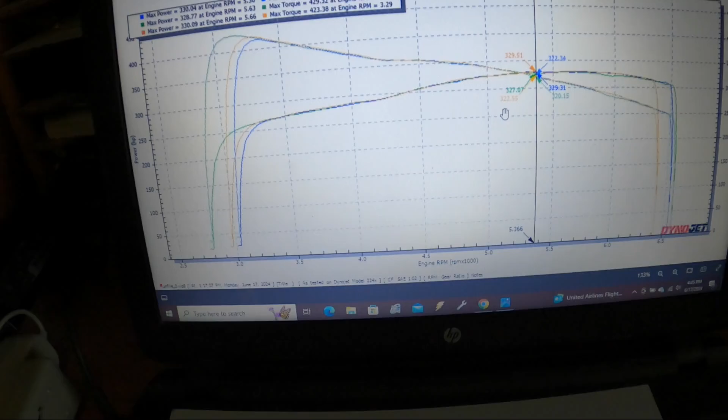Alright, so let's talk about the results. Got it pulled up here, got my graph here, plus I got it pulled up here on the computer. So in the blue here, maybe you'll see it better here.

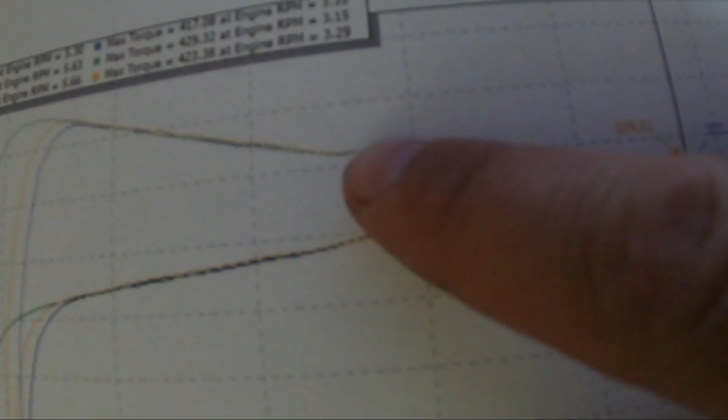That was the first run: 330.04 horsepower at 5,300 RPM. The torque is showing kind of high, but if you're looking at this, this is the converter flash, and even with it locked, I'd say somewhere around here, about 4,300 RPM, it's leveling off, and that's about 359, 360 torque.

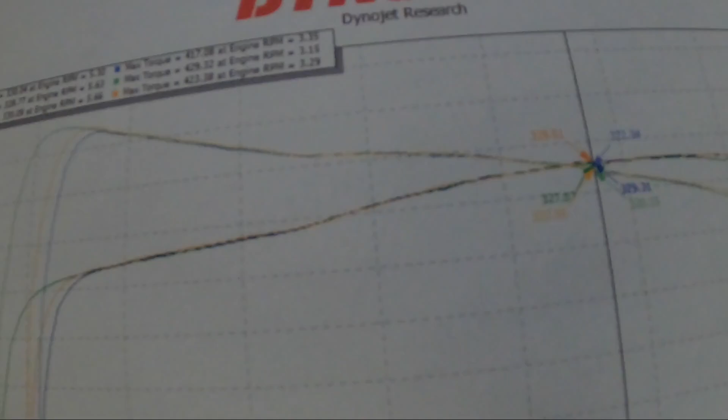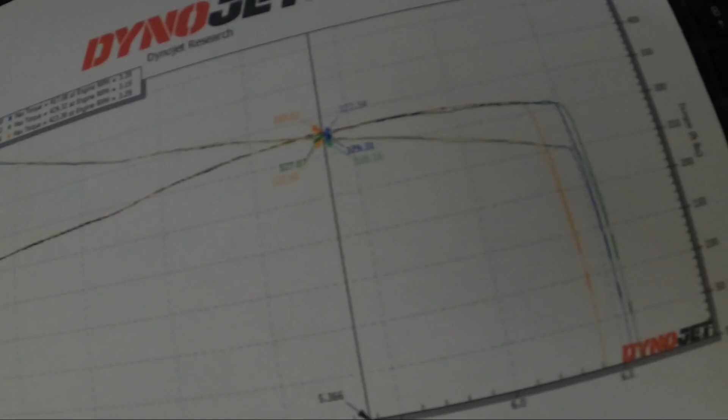Makes more sense. So next run here in green, maybe it'd be better if I just continue here. 328.77, that's open cutouts. You can see it shifted to 5,600 RPM though, but look at the graph, it railroad tracks.

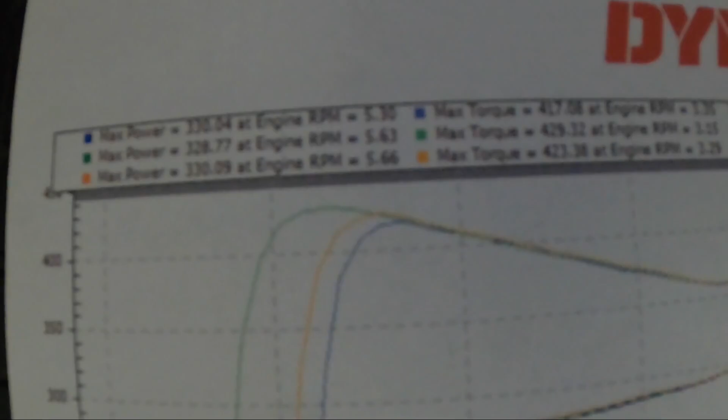So only thing I can say about this, where you're probably thinking the same thing I did - oh, it lost power? Well, not maybe that it lost power, but we shut the truck off after this last run here. I grabbed my channel locks and gloves and I uncapped the exhaust. We started back up, so it might have cooled off some. I don't know, but basically it railroad tracked.

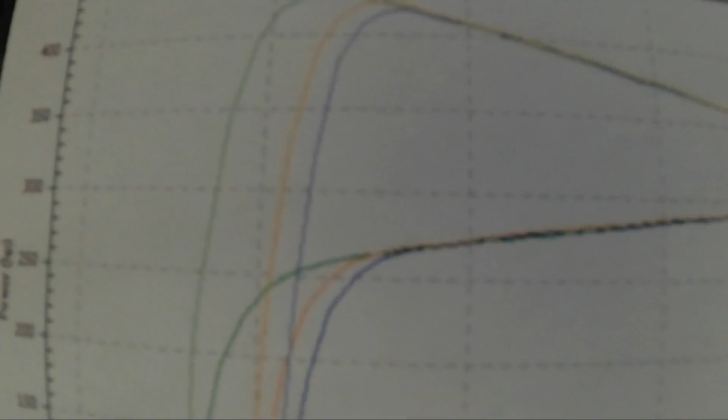It's funny though that it peaked a little higher in the curve. It says it picked up torque on the converter flash maybe, but you could see, look at those lines, it railroad tracked. Then for the last test, you can see I put those old Tahoe wheels on - they're 10.5 pounds a piece lighter, so 21 total. And it obviously cooled down because it took me a few minutes to change out the wheels and tires, and we had to put it back on the dyno and shut it off, strap it down yet again.

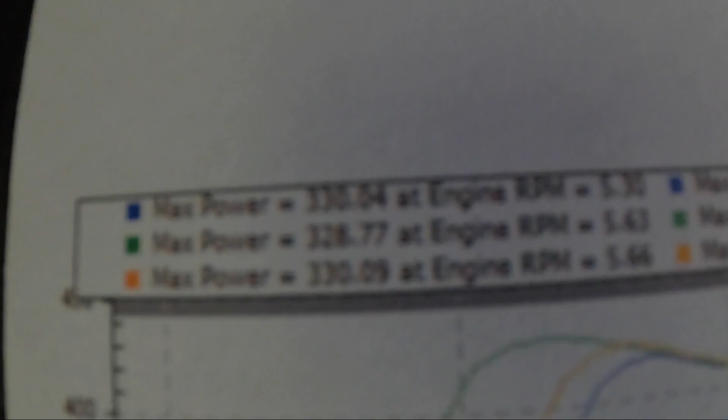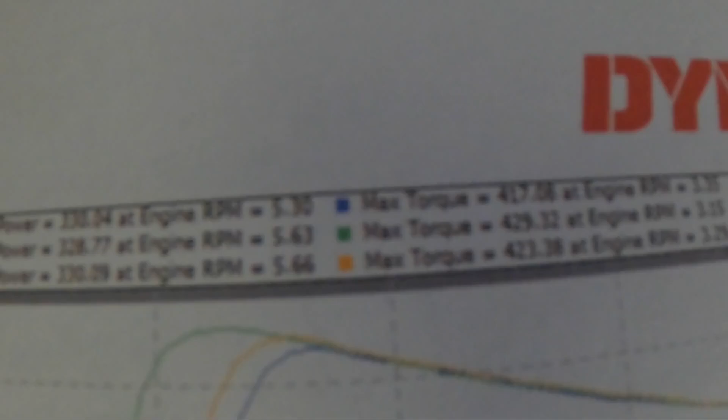Again, you see the torque numbers. You know it didn't lose torque from lighter wheels and tires, that's just the spike's a little different. But yeah, it makes the exact same power. They all pretty much railroad track each other.

Color me a bit confused. We're going to delve in here. I'm going to pull up some threads I found online, some older threads that showed you pick up power from going to a lighter wheel and tire. I didn't expect to pick up a lot, being it was only 21 pounds combined, but I figured a little bit shift in power. None. This is a 248X Dynojet. It's fairly new, they've maybe had, including my truck, maybe 24 vehicles on it. So it's been calibrated, etc. There's nothing wrong with the dyno. It's reading right, it's doing what it should do.

As far as the whole thing with open cutouts versus the exhaust, at the power level I'm at, or lack of, however you want to say it, obviously I built a pretty damn good exhaust system. I'm going to pat myself on the back right now, but I'm going to continue to run with open cutouts at the track because it just sounds cool, and I think in some cases it rattles the guy in the other lane when he hears how loud the truck is.

Hopefully I'll put the other engine in, making a good amount more power. The cutouts will help. Otherwise they're a novelty.

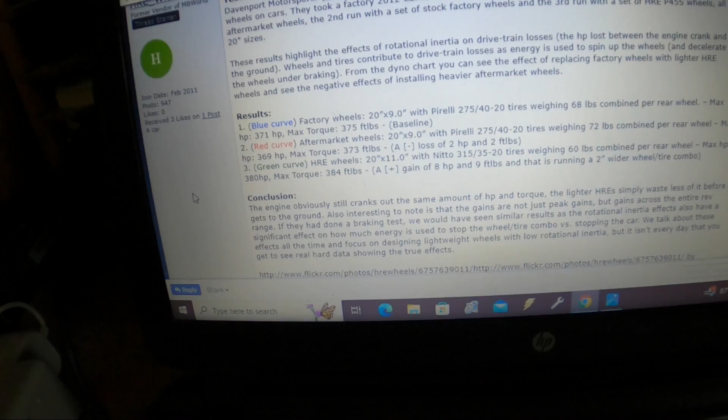Green curve: they put some aftermarket HREs with wider tires, 60 pounds apiece, so they're 8 pounds apiece lighter. That'd be 16 pounds overall less rotational mass. I lost 21 off my truck switching those wheels. Okay, we're going to gain something, right? 380 horse, 384 torque, a gain of 8 horsepower. They're saying it's actually 9 if they did 371, and 9 foot-pounds of torque. Clearly that's not what happened in my case.

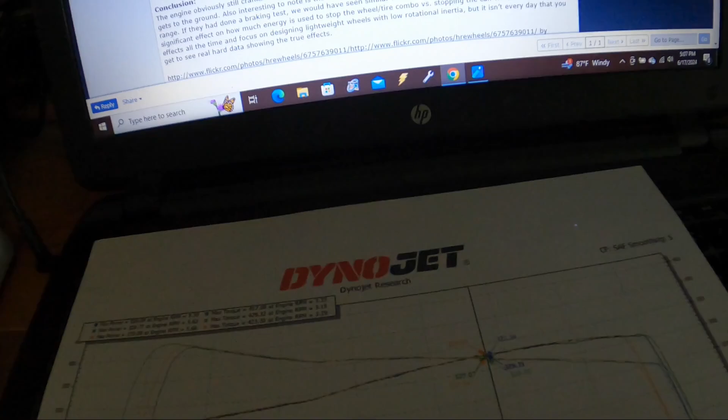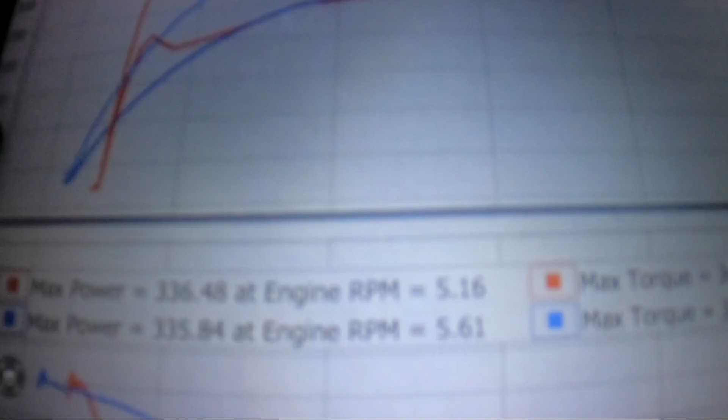I'm going to do this on my phone because it's just plain easier here. But here's my old dyno graph. This is with the 4.10s. The 336 number is with the factory converter that was failing, and the 335.84 run was with the TSI converter that barely flashed - it was actually flashed lower than the stock converter.

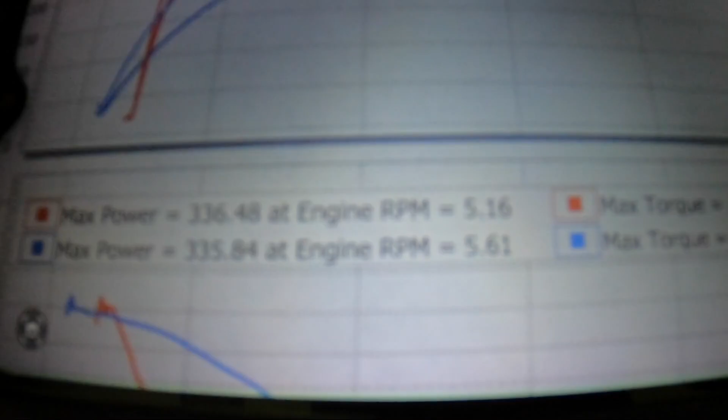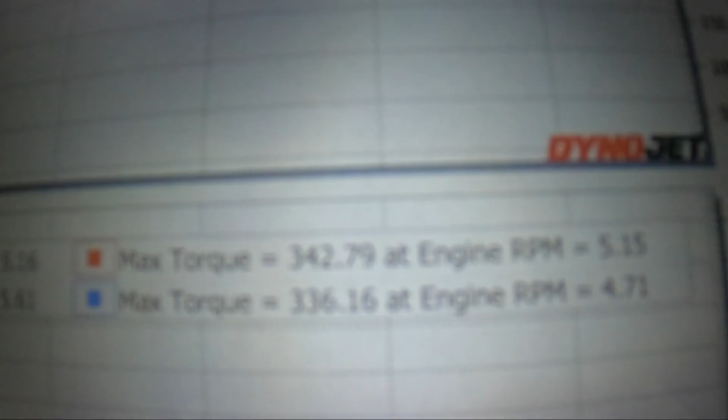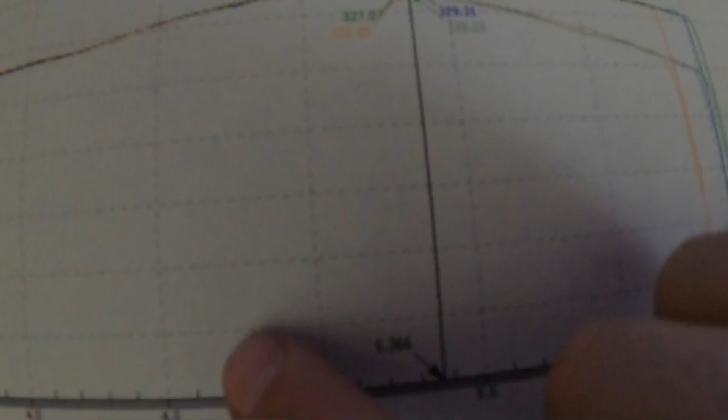And there's the torque peak. It was wonky because of the lockup clutch on the stock converter, but it's saying 4,700 RPM. Not what we saw here, obviously. 4,700, it's rolling down, so I don't know.

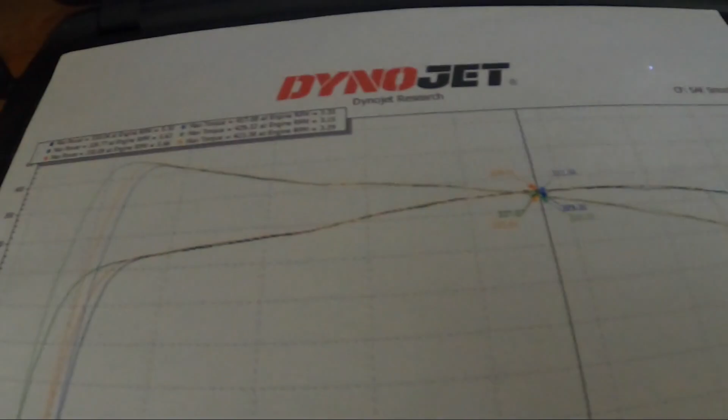But this next thread we're going to check out, going back to the message board again. So if you look at those two, best dyno to best dyno, I'm down almost 6 horsepower. Okay, I can say that's from the gears.

So this one was in an F body with a 7.5 rear, power drop going from 3.42 to 4.10 gears. The guy says his brother-in-law sent him a dyno sheet from his car - went from 3.42 to 4.10 in a 6-speed car. Lost 15 horse, 17 foot-pounds of torque. Glad I didn't lose that much. This guy here, he says you'll see a horsepower drop, it's normal.

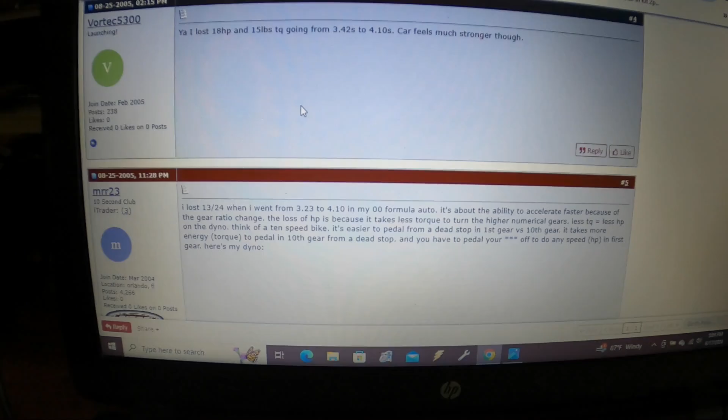He lost only 5 horsepower, 273 to 342. That seems more like my scenario, where I lost about 6, from 410 to 456. There's another guy, 342 to 410, he lost 18 horse, 15 foot-pounds of torque. And this is another one, the automatic car, 323 to 410, lost 13 horse, 24 torque.

So, I know that's digging deep. That thread on LS1 Tech's from '05, and the one in the Mercedes-Benz forum going back to 2012. We're going back a bit here, but I checked these threads, and I'm like, alright, I put lighter wheels and tires, and by their math...

I'm going to pick up, what, almost 20. And then what people are saying they're losing from the gears. So I said, okay, it's going to lose about that much and kind of even itself out. And then there's this whole exhaust cutout thing.

I have a friend, Rob, I mentioned him before, down in Conroe, Texas. He went to the School of Automotive Machinists, and they dynoed his F-body car there. He's got a catback and long tubes on the car, all the bolt-ons, stock heads and cam. He said he picked up like 9 horsepower on Sam's dyno. Totally believe it, but it's a cross-flow muffler, so they're not the best flowing thing.